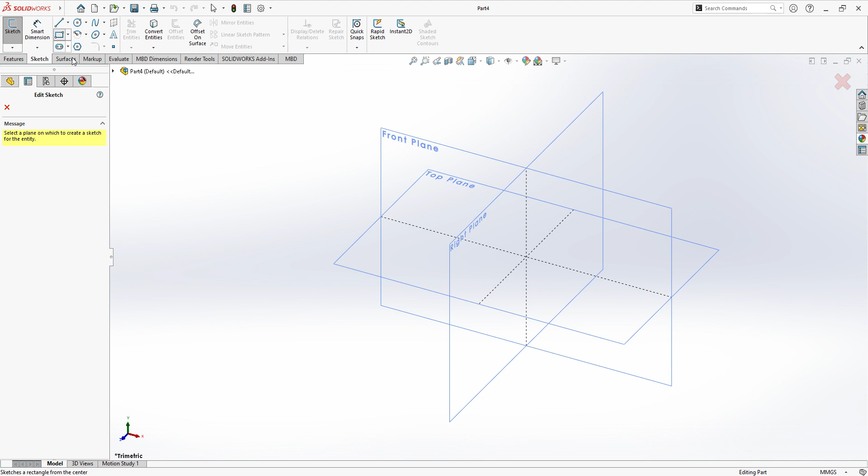I'm just going to grab a center rectangle and put a few measurements on this, say 60 by 60, and I'm going to extrude it then 60 as well.

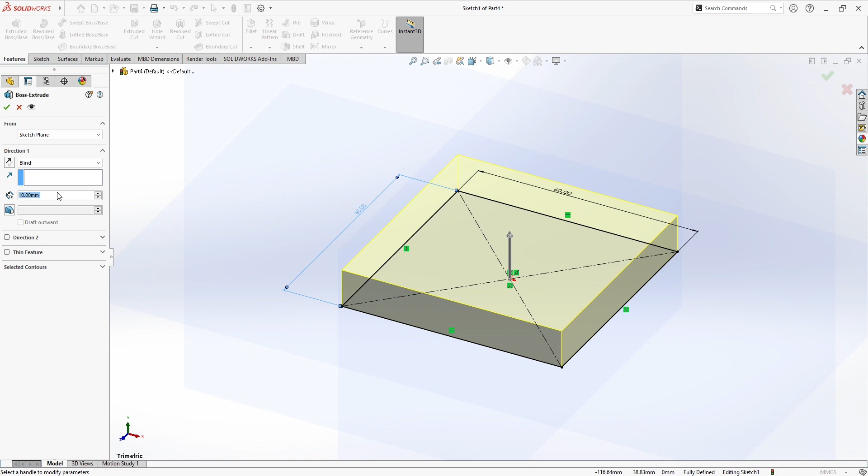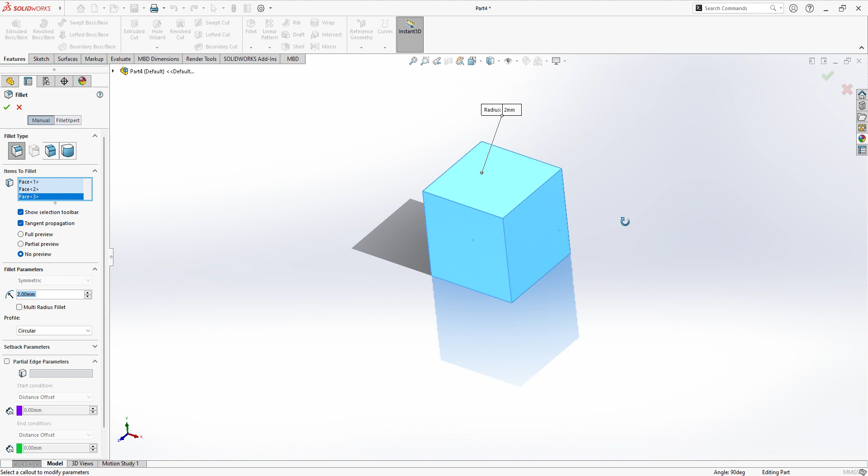So there's my cube. Now if I wanted to be clever here, I could save myself a lot of time later by filleting this to maybe 2mm, and if I grab all 6 surfaces here, it'll save a bit of time later on, and it's going to fillet all of them. That's a good move there.

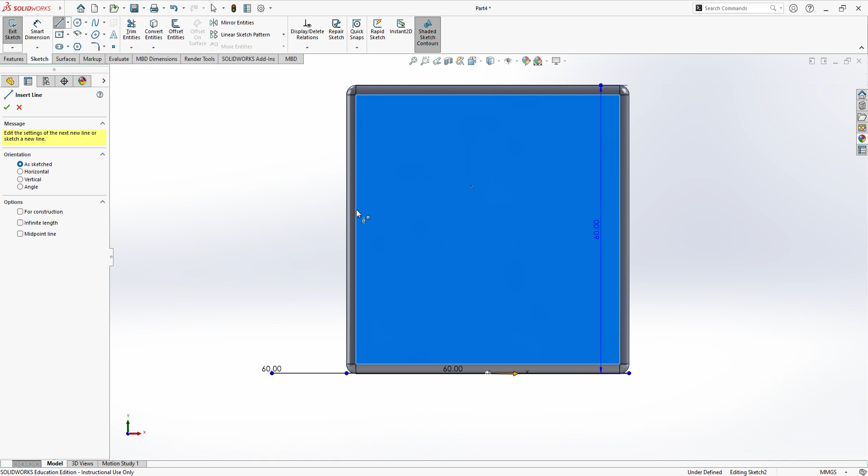So now I'm going to go space bar, get a front view. So there's a front view of it. I want to sketch some lines here on this surface, and let them run out. Now all that matters here is that's a line.

And put another one, let them run out past, make sure they're horizontal, and then I'm going to put 2 vertical ones. Make sure you get that vertical symbol popping up there, and there. So that's fine for them.

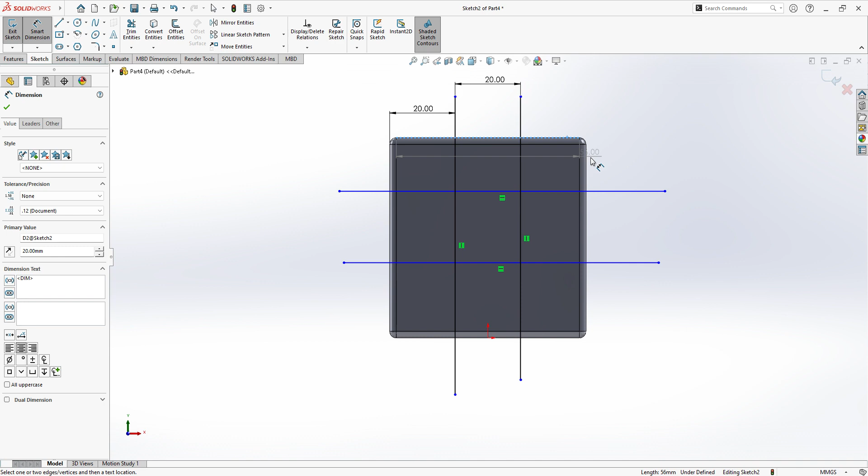Now I want to smart dimension them so that from the outside edge into here is 20, and then from there to the next line is 20, and then from top surface down to this line is 20, and finally from that down to here is 20.

So that's like X's and O's, fox and goose grid. I'll just show it to you there now. It's drawn out in the outside surface there, but it doesn't matter.

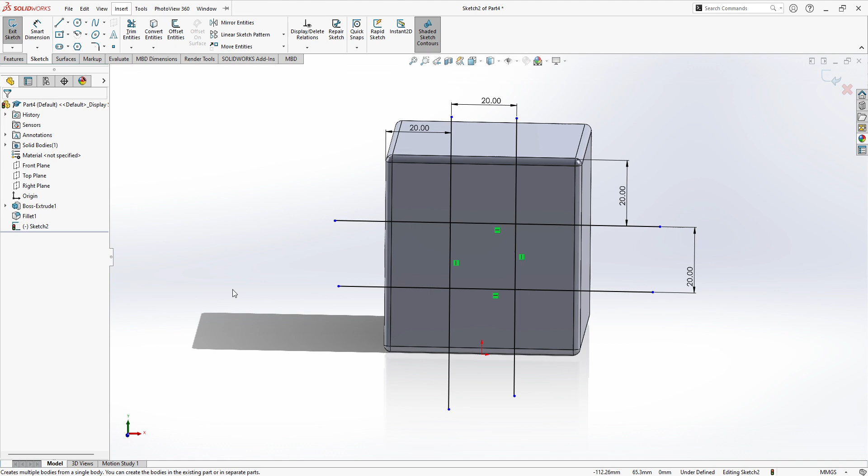So I want to go here now to insert features, split. That's the sketch that I want to use to split it. Say cut the part, and you're going to have to - it's a bit slow there, but it's a nuisance. You're going to have to go along here and cut all 9 parts there.

So that splits that now. It's like putting a cheese wire through a block of cheese, I suppose, or something like that.

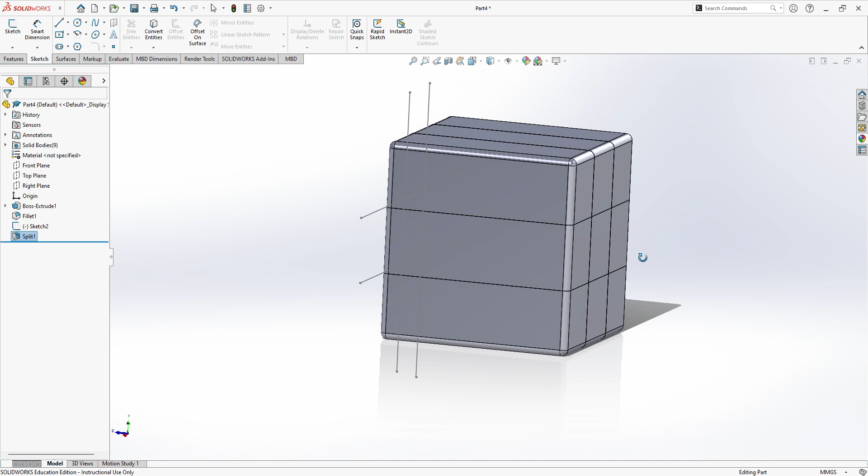Now my next move is I want to do 2 lines on this surface over here. So I want to draw a line on this end plane, and this is the same thing again - make sure you pick up the vertical on that. Another line over here, make sure you get that vertical again.

Now if you do draw it crooked, you can just click on it afterwards and pick vertical here as well.

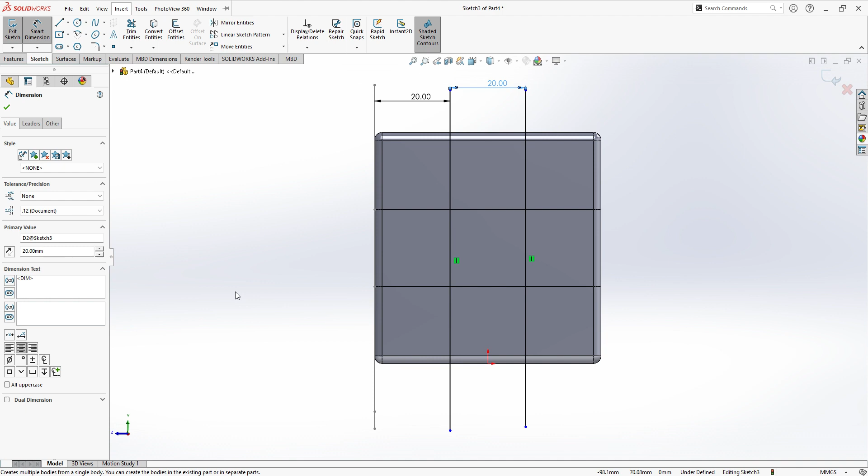Then I want to dimension this, so from that line into here we want 20, and from that line over to here we want 20, and I want to split this again. So insert features, split, and cut the bodies. And this now is a bit of a nuisance because there's now 27 bodies, I think.

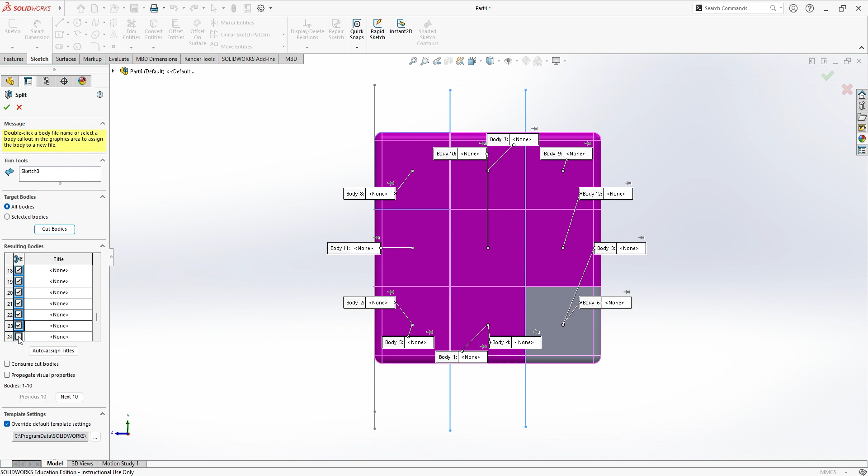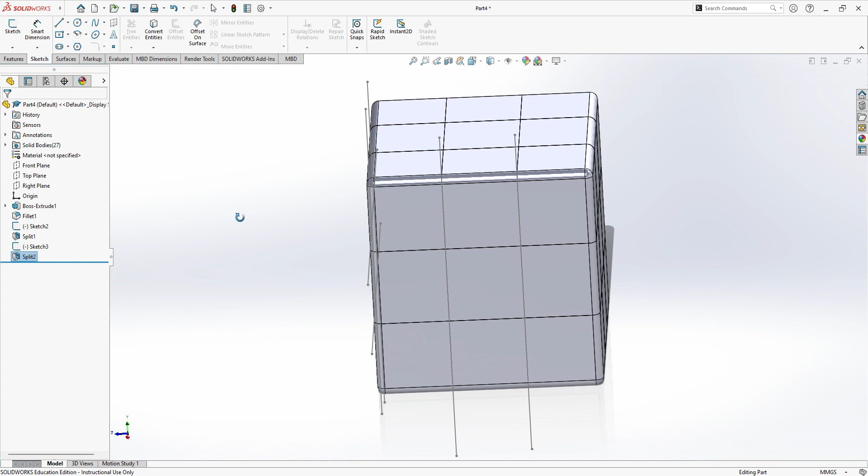Okay, so I want to keep all of them. Make sure the consume cut bodies is unticked because we want to keep them, not consume them - that would get rid of them. So that there now is the cube. That's all the cubes.

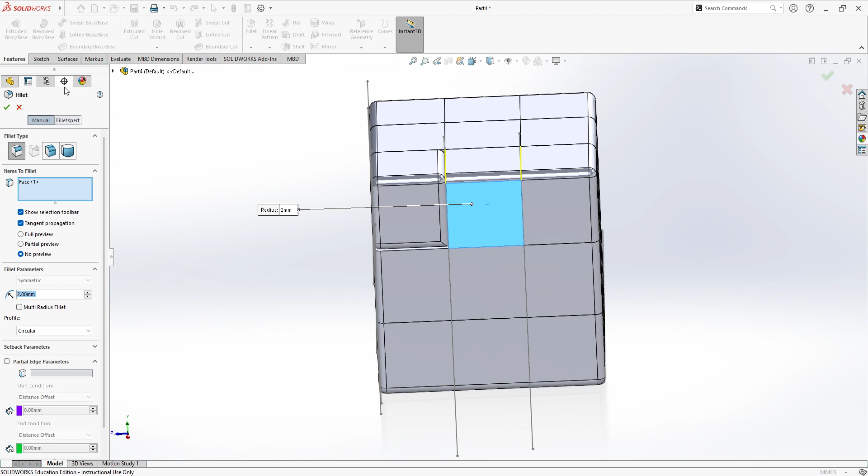So what I want to do here now is right click, and I want to, in features, fillet all of those bit by bit. So you'll see there now, click fillet and say OK, and bit by bit there it's going along and it's going to fillet every one of them.

So you've got to do that for the entire every surface there, which all those bodies, which takes a bit. Now sometimes if you hold down the shift key, you might be able to select multiple faces and see will it fillet it.

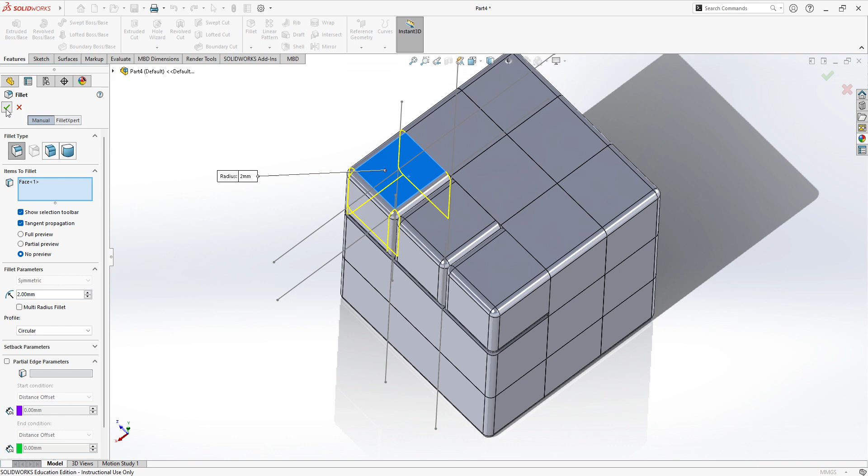No. So I don't know if there's any good shortcut for that, but you can see as you go along there. And in terms of putting colors on these, because I'm not going to go through the whole thing here now, it would just be too slow, and it's repetitive.

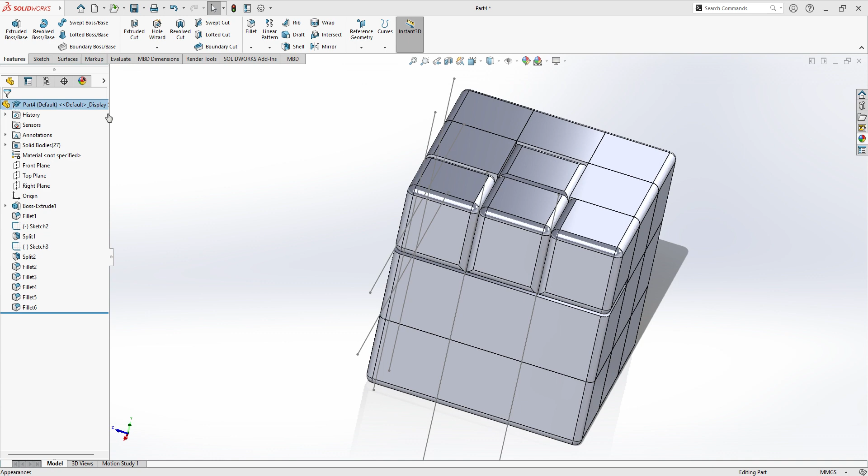But what you want to do is you could right click the appearance of the whole part, and I'd grab over here that - that's just after opening to the outside here. I gotta drag it in here. I'd grab plastic and just go low gloss black plastic for all of that.

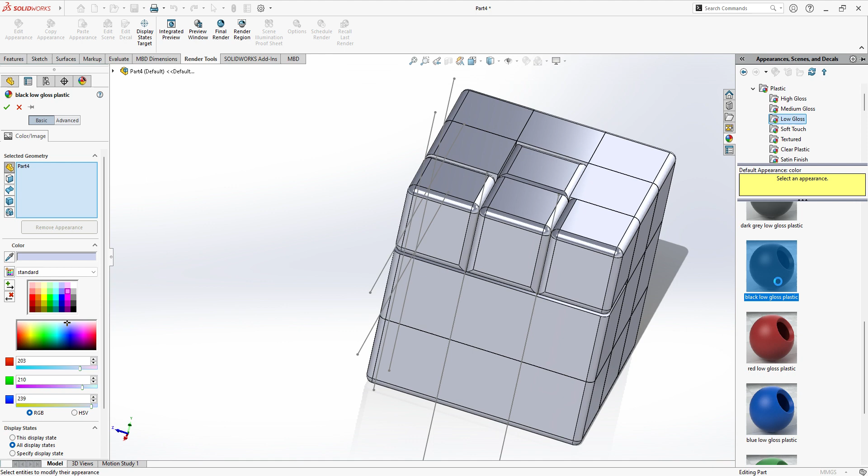And then I would probably hide those sketches there. Right click on that to hide it, and right click on that to hide those sketches.

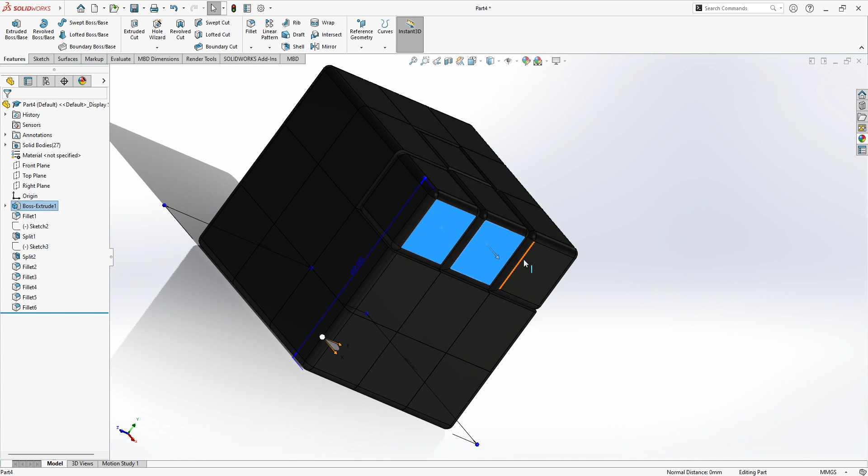And then I would hold down the shift key and I would try grabbing those faces there and right click the appearance of those faces, so you could make that maybe red. Now because that's looking wrong there now, since I didn't fillet these surfaces.

So you can see once I fillet them, it'll look much better. I'll just do this last one here now.

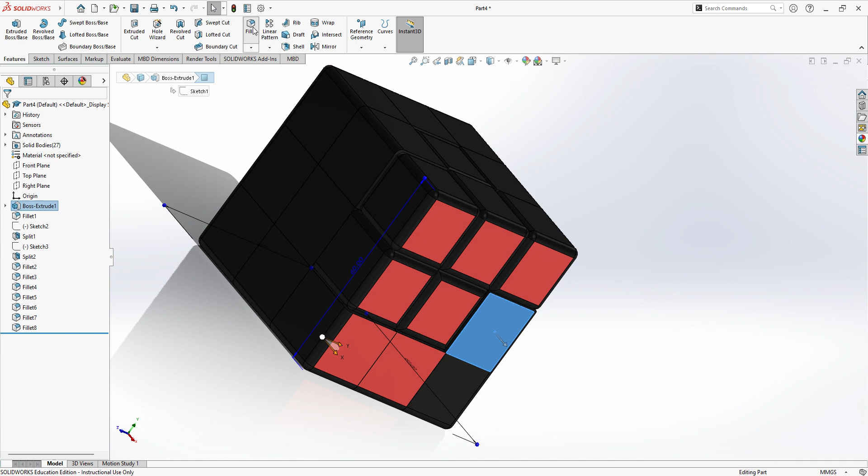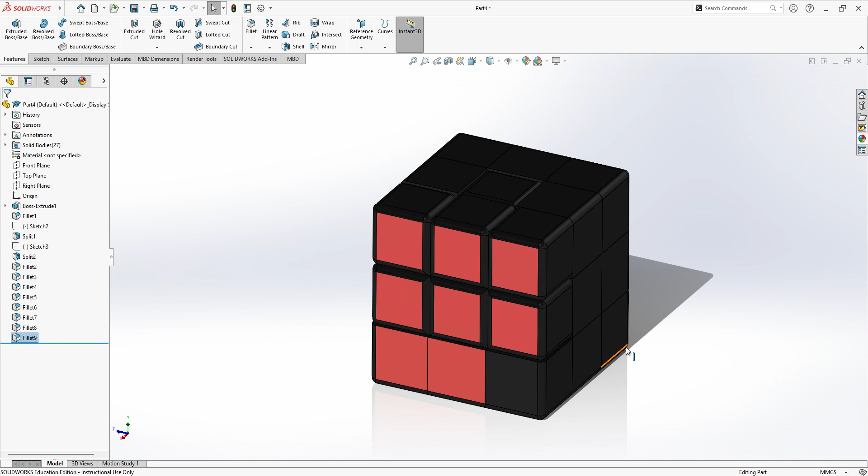So what you want to do then is just apply fillets to all of them and surfaces and different colors to all of them, and when that's completed there, that's a really nice project. You can do it first or second years. Obviously they have to be walked through, but yeah, they love that. Beautiful project.